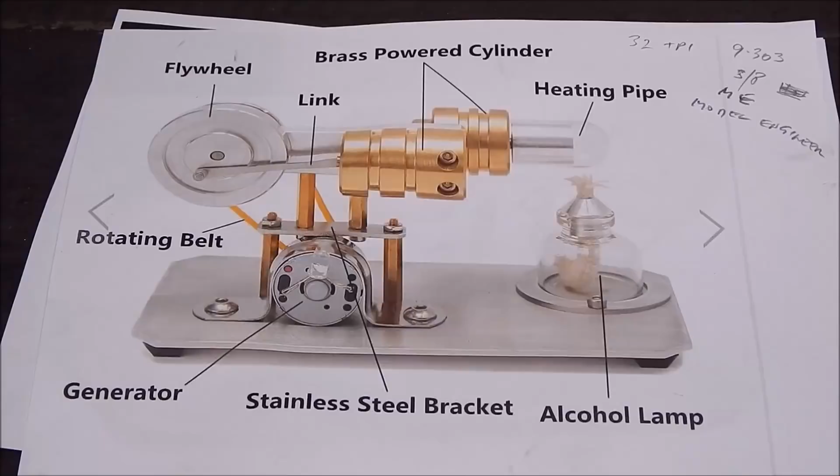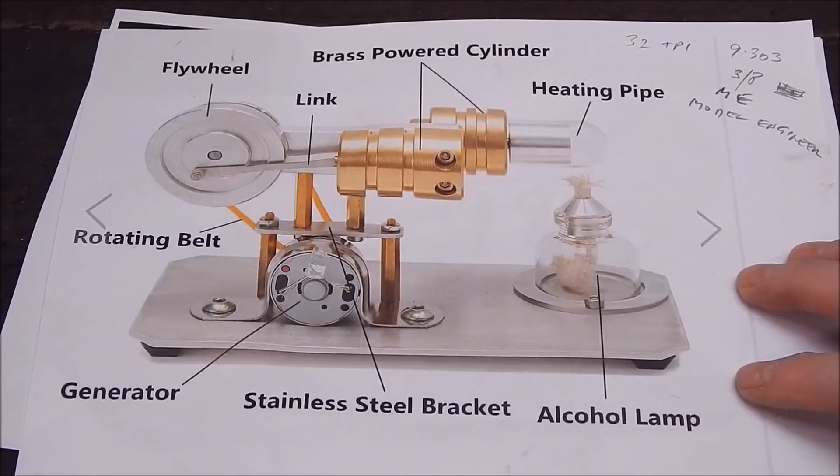The first cab off the rank is going to be a Stirling engine. I've been wanting to make one of these for a long time, and I've played around with this sort of stuff for years, but over the last 10 years I haven't done anything in this line.

Anyway, this is what I'm going to make up, something similar - this is a Banggood Stirling engine. These are some photos from the Banggood site, just that little twin piston thing, or displacer and the other compensating piston, I suppose you call it. It looks pretty neat, and it shouldn't be very difficult to make this really.

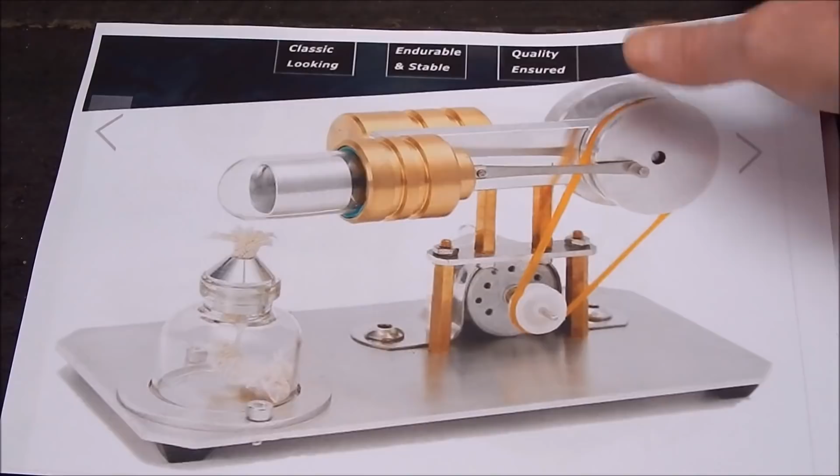I got these photos off their site. This one drives a little generator, can you believe? How cool is that? I think it was only about 40 bucks or something like that. It was cheap, for you know.

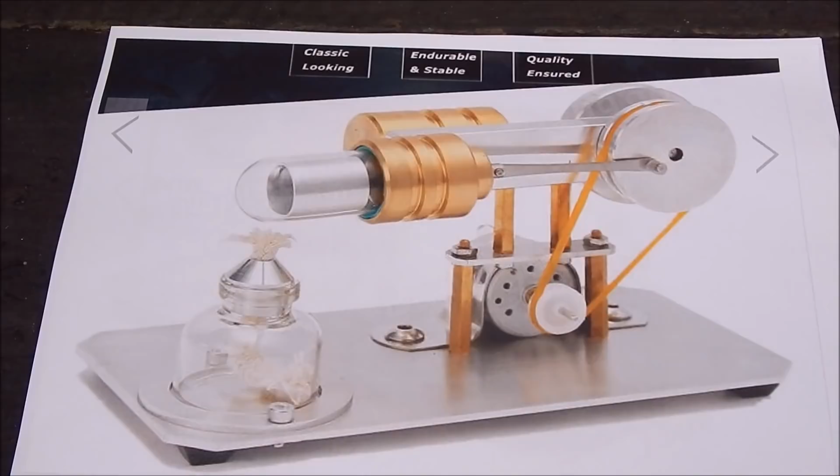As you can see, you can get some sizes here. Mine will be probably a bit longer than that, but that's what we're looking to make. That's where we're headed. So, what to do?

Well, first thing is to see how this piston here, which I'm going to do in glass, how that's going to work in.

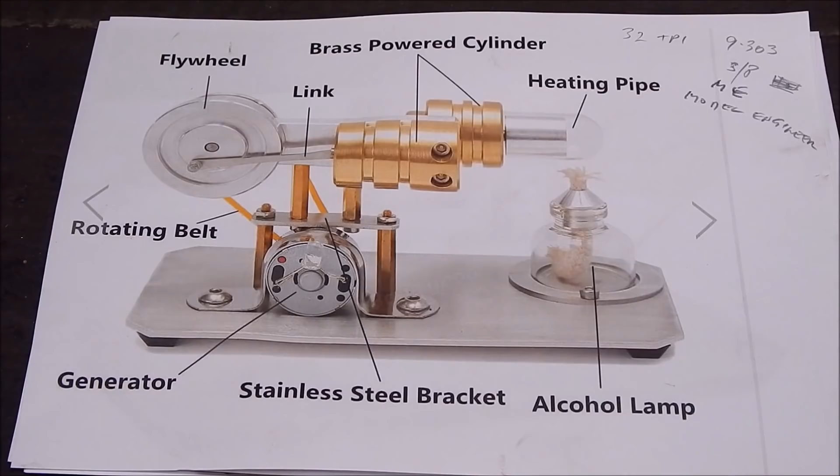Craig Group sent me a couple of air pots. These are really neat things, beautifully made, and they can be used as a dampener. See, they've got a graphite piston, and you can use that.

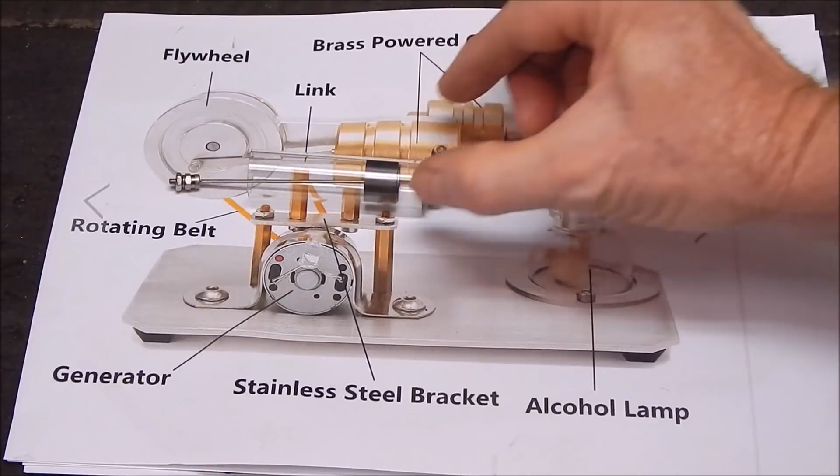So that I want to use as this piston here. I'm going to have that there, and then I'm going to make up in glass, and then make up a brass displacer over here. So basically, looking down from the top, you're just going to cross-link them.

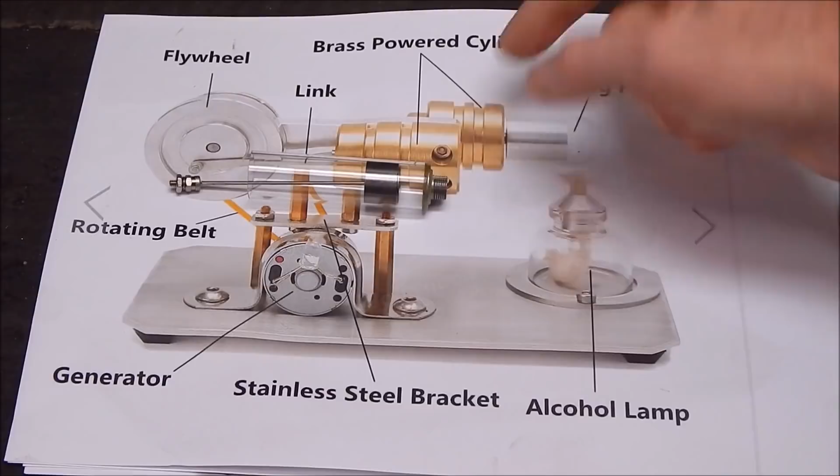Should be pretty easy, because you just have a piece of brass here, and they'll just breathe, one into the other, and then have a longer crank throw on this one. Yeah, it should all work out pretty neat, I reckon.

Okay, all pretty simple. I mean, these are real good, the way they make them are beautiful.

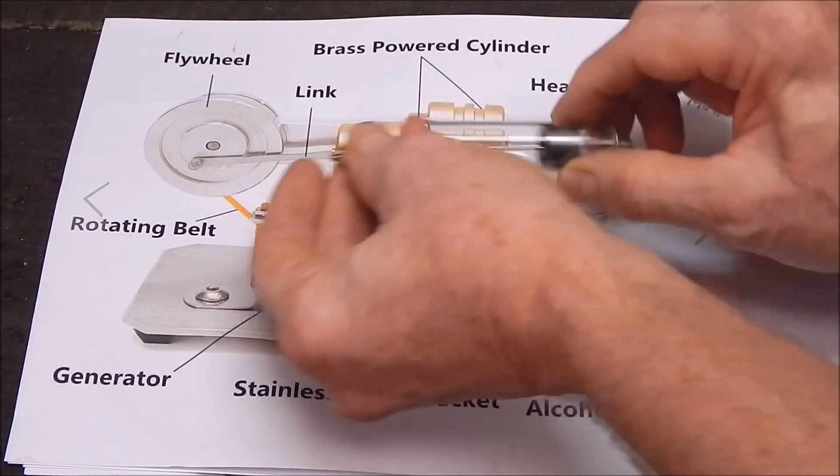Now, first thing is I thought I'd better check the tap on this, the thread on this, to see what size it is. And this is where you get your first surprise. It's nothing like any tap I've got. It's actually 3/8 ME - a 32 TPI 3/8, which is very unusual.

I have to look this one up. So ME is actually model engineer thread. So as I haven't got a tap, and I'll definitely need a tap to do the threading, either buy one if you can get one easily.

I know you can get them off eBay, but they're not cheap. You're talking $13, $14 for one tap, or a set of three for about $35, which is normal - that's the sort of prices you pay for taps in high-speed steel.

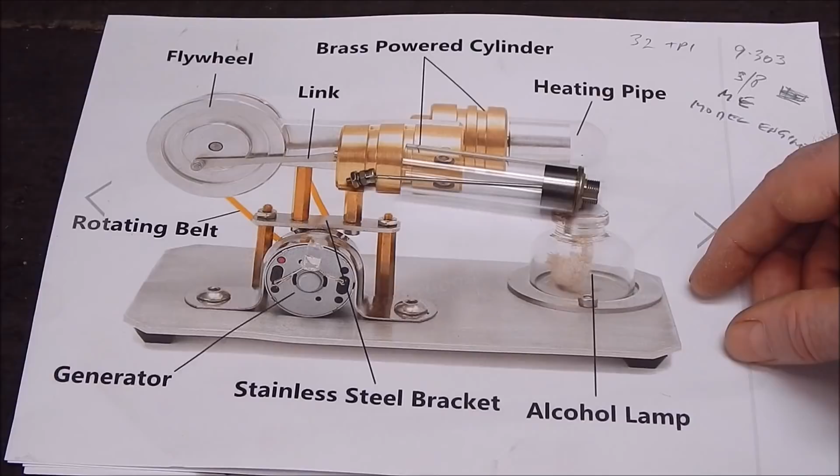So I thought, screw it, I'm not going to bloody pay that. I mean, I'm tight, as you know. Yeah, I'm pretty tight. So if I can make it, I will. So I made one. So here's the thread.

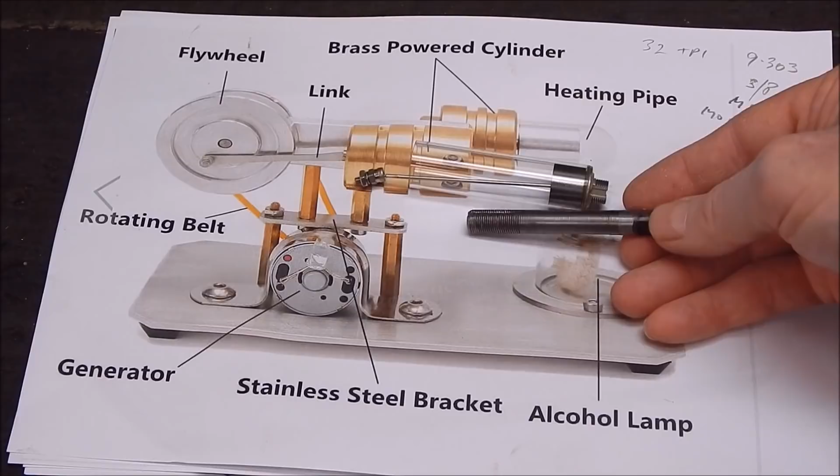Here's the tap here. It's no work of art, it's a bit... no, it's okay, I suppose. But anyway, for anybody that doesn't know how to make a tap, they're really, really simple to make.

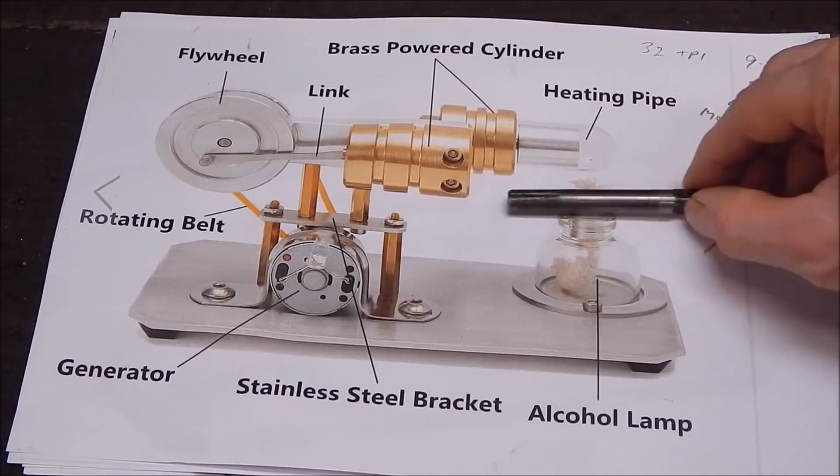Basically, all you have to do is get some steel, which is hard steel, but it has to be able to be machined. So I used a form of 1080 spring steel here.

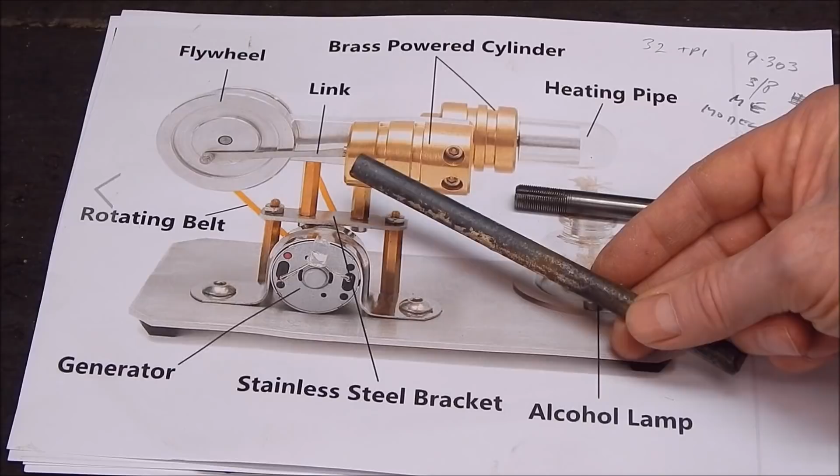It's not as springy as some spring steel, but it's hard enough that you can't machine it without annealing it. So heat it up red hot, let it air cool, and then you can work it. After you've done your machining and everything to your satisfaction, heat it up to red hot and drop it in a bucket of water, and she's hard again. That's the simplistic way of doing it, and it works fine.

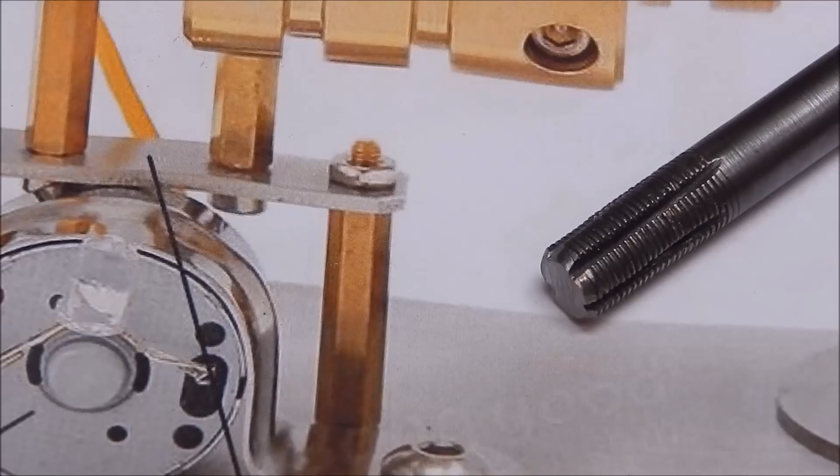So I'll come in close on my little tap here. As you can see, all it is, you've machined the steel down to the correct diameter that you need. You've cut a 32 TPI thread in it with a single point cutter.

You then slotted it with a slotting disc, and I just used a Dremel - any rotary tool will be okay. I've put 4 slots in it. A normal tap has 3 slots. You can make them as wide as you want. All they have to do is give you some clearance.

By having 4, this is a bit rough and ready, so don't get too carried away with this, but it works. By having 4 slots, it gives you 4 cutting edges, so it should theoretically cut a bit better than 3.

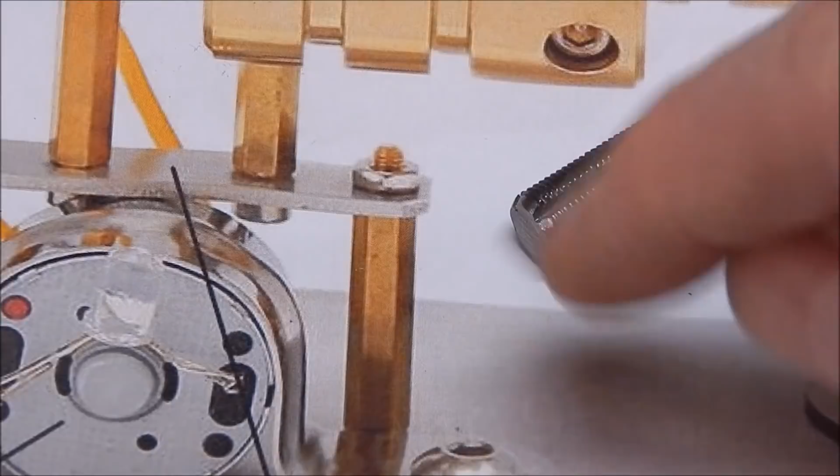And when you do cut the slots, you undercut towards the direction of rotation, so not straight down at 90, just cut it back on a bit of an angle, and that will give you more of a curve edge. Then just heat it up, drop it in the water, and she's good to go. And just put some flats on the end.

Does it work? Well, of course it works. I made it, it has to work.

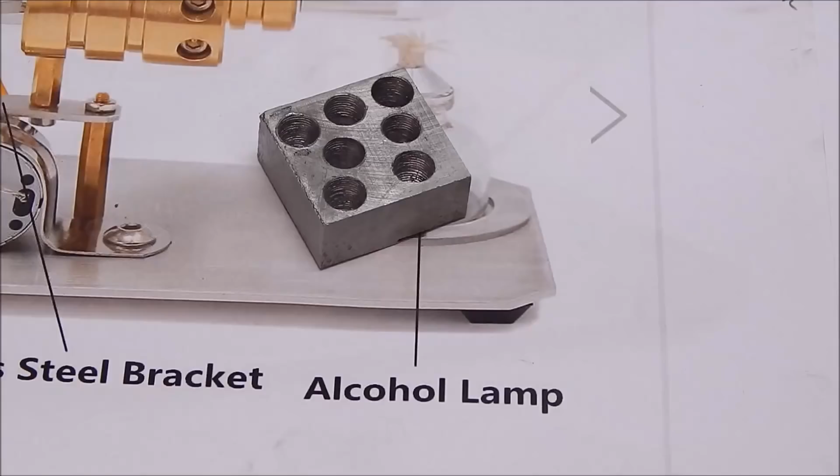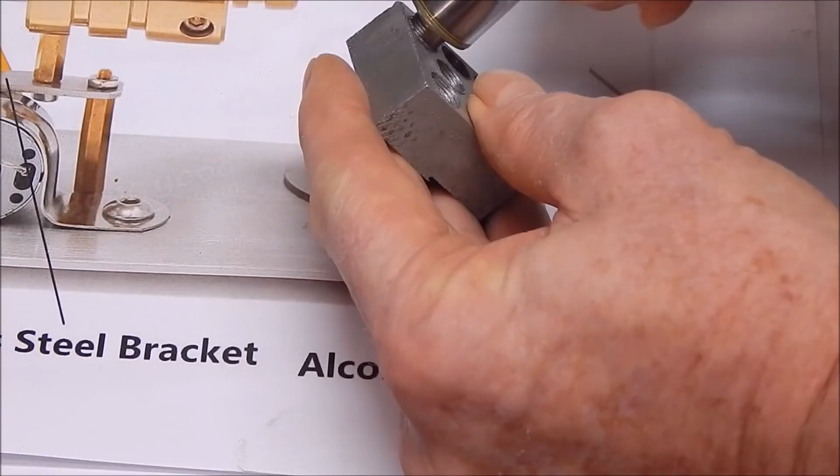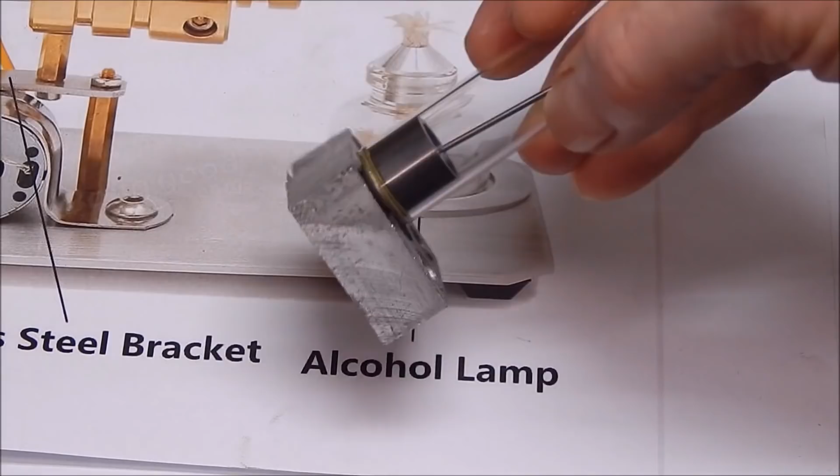So here's a bit of aluminium, scrap aluminium, that you can see I've played around with, drilling and tapping into it to make sure I got it right. I had to have two goes at doing this because there's a couple of things you have to be aware of. So this is just some scrap. Here's our little air pot. And she screws in. Look at that. Perfecto. No problem whatsoever.

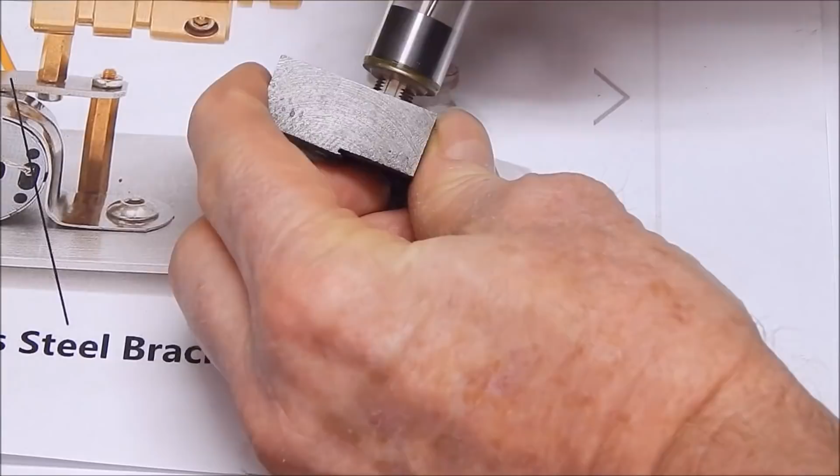I think this one over here also was the correct size. Yeah, this one's a bit more snug. That's better, that's the best of the lot. So I used a different size drill on that one. So there you go.

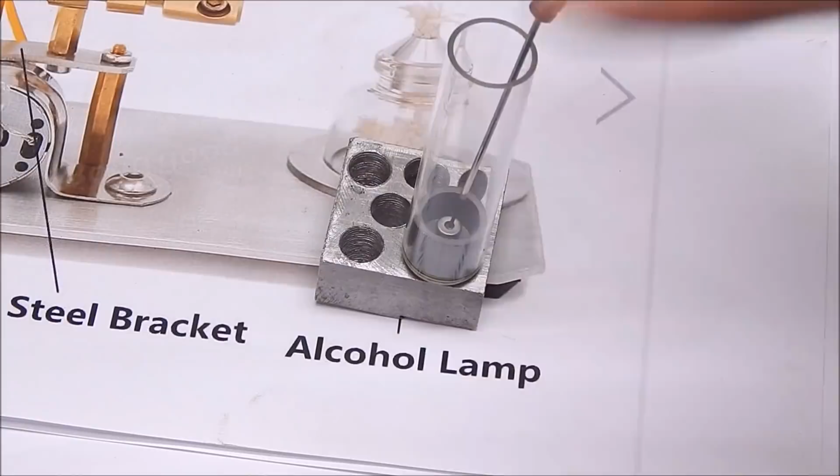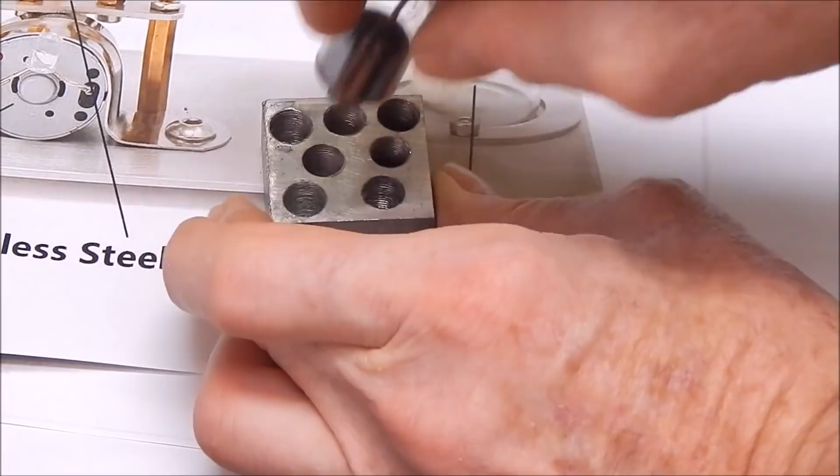Well, it's going to go that way, isn't it? Cool bananas, so there you go. Yeah, you can do your own taps, easy. And these are really meant for soft metals like aluminium, copper, brass.

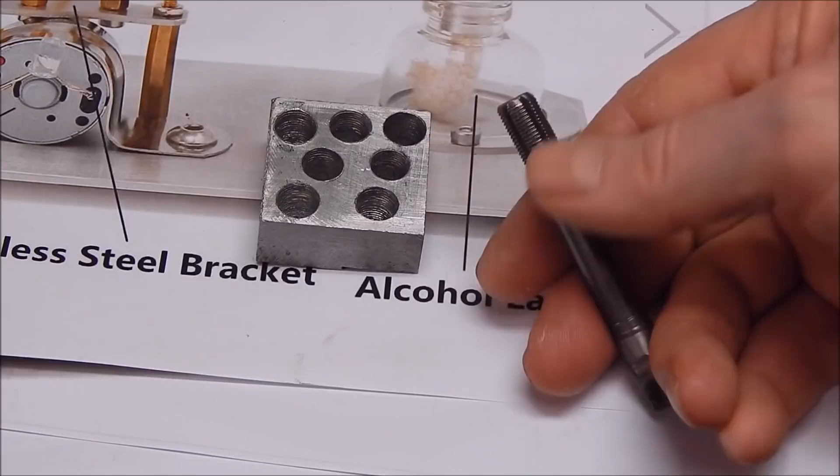Well brass I should have said, I'm not going to be using any copper. You could use them on steel, but they'd probably lose their edge fairly quickly. I've made these in the past for one-off jobs in alloy. I've never made one to use on steel, but generally working on stationary engines and stuff like that, which are aluminium, I've had to make up studs and stuff, put in bigger studs, and you haven't always got the right tap, so that's it, that's the name of the game.

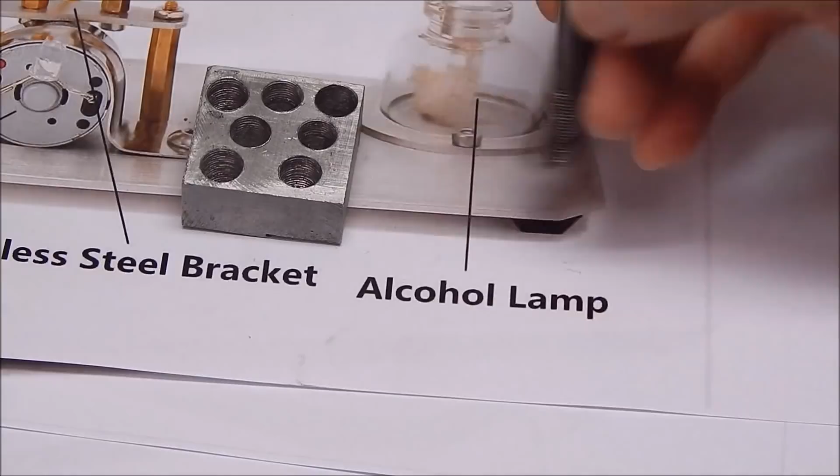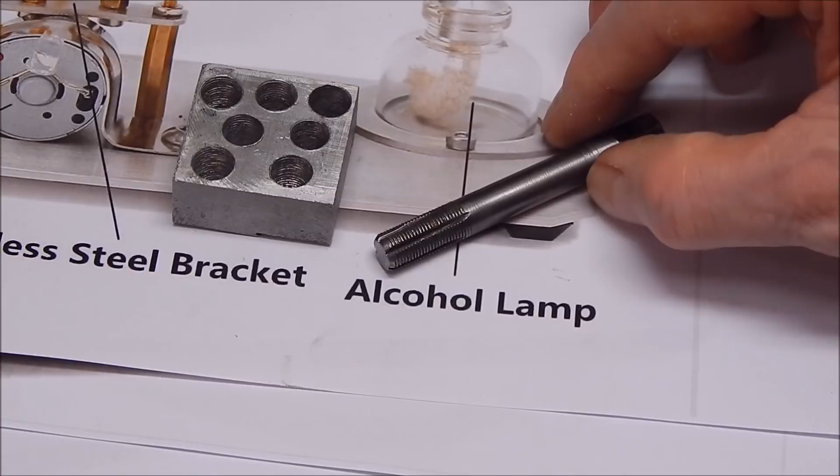So what could possibly go wrong making this, with all these extra holes here? Well, this is a fairly shallow thread for a start. Being 32 TPI, it's not going to be a deep thread, particularly in 3/8. So when you drill your hole for the thread for the tap to go into, you have to make sure you use a correctly sized drill. This is where not all drills are the same.

There are big variations. That's why people go by thread charts, but quite often thread charts aren't actually all that accurate, because there's a variation in drill sizes. You might pick up a drill which is supposedly 5/16, but if you measure it, you'll find quite often it's not. It could be 10% either way. Measure your drills with your micrometer, your drill sets, you'll get a big surprise when you see what they actually are. They're not always the nominal size. In fact, they're rarely the nominal size, particularly the cheaper sets.

So anyway, what am I saying? Well, when you machine this up, there's a couple of things you need to know. First off, we'll measure this tap, and we'll see what the actual thread diameter of that is.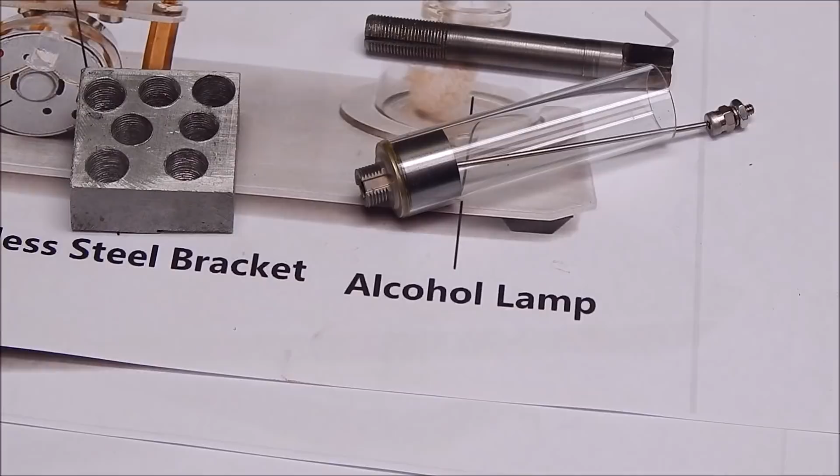9.33... 9.327, that's more like it. Yeah, so it's basically 9.3.

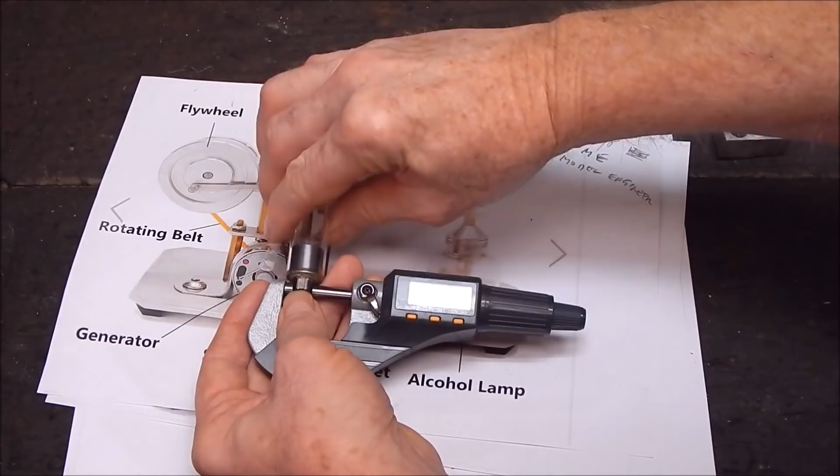Now, the problem you've got is that when you machine the rod to size, 9.3, we would machine this blank down to that. Now, if you machine it with a single point thread at that size, what's going to happen is it's going to be too big, because even though this is the same size as the thread diameter...

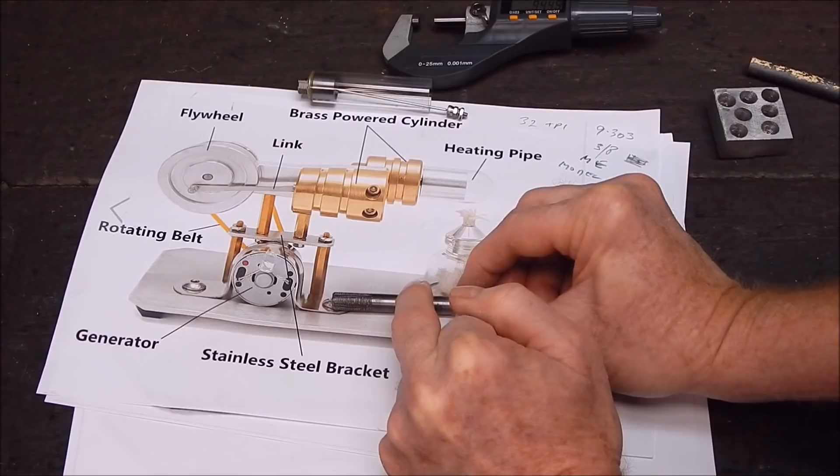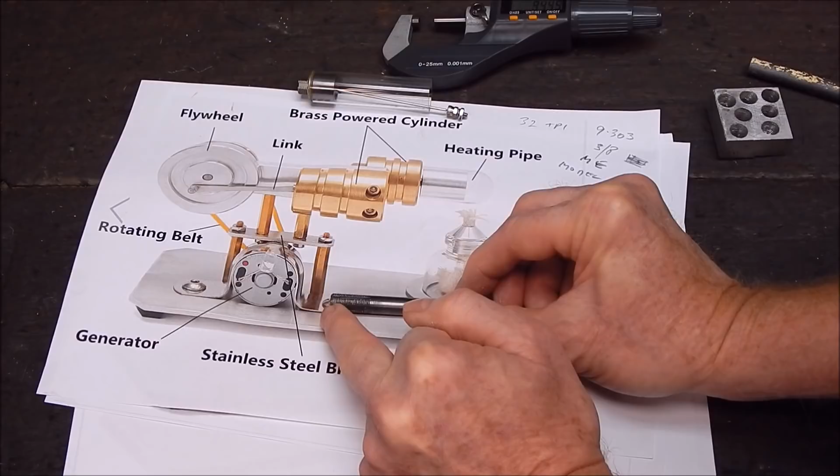When you do single point cutting, and it varies with the metal how much is going to happen, not only are you cutting, but you're also compressing, and metal will move around, and basically what happens is the thread will grow. The diameter of the thread after cutting will be larger than what you started with. So that means the thread you cut will be too large. So you have to reduce the diameter of your starting blank to compensate. So whereas we were starting with 9.3 mil, I reduced it back to 9 mil after the first one I made was too sloppy for my liking.

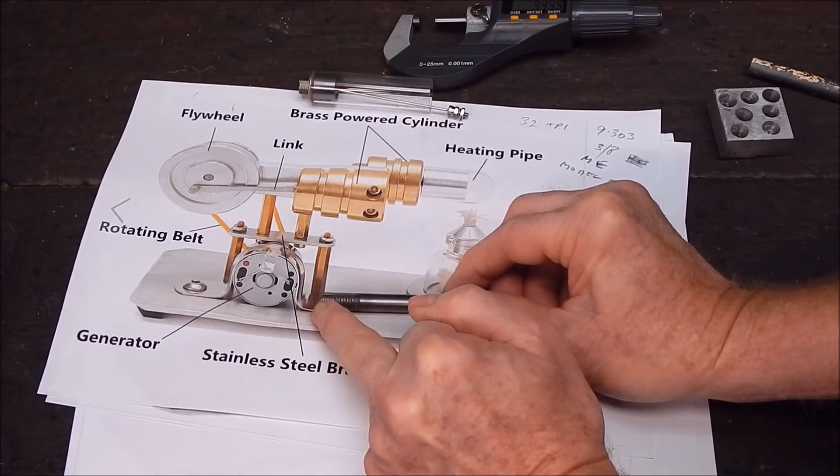And at 9 mil, it then cut a 9.3 mil diameter thread. So basically, you've got 9 mil here and 9.3 there. So it's a perfect thread. That's what you have to watch out for.

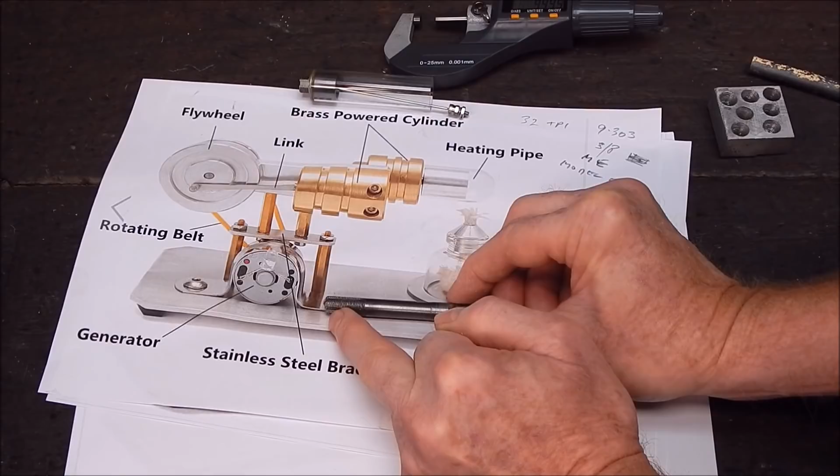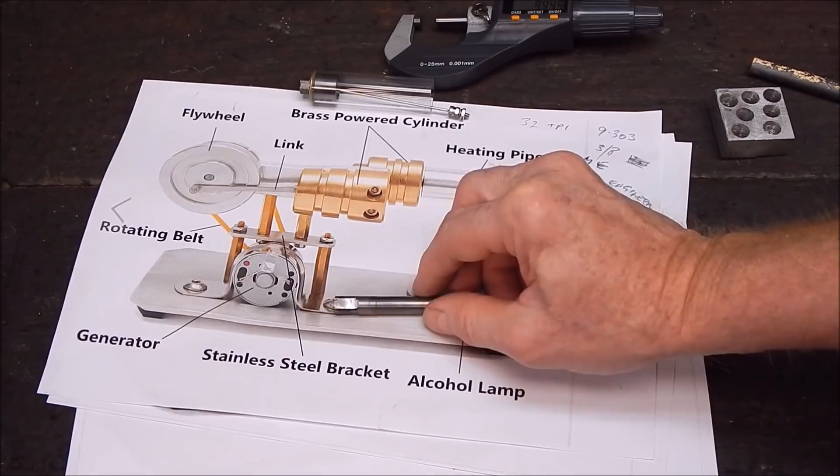Also, when you do your single pointing, make sure you've got the angle of the thread gully correct. This thread is a 40-degree thread by my measurement. Normally they're 60, that's the most common thread angle. So I had to grind a special single point cutter to do the job. But basically that's it, it's very, very simple to make these up. Anybody can do it. You just grind your flats on with your bench grinder, nothing very flash about the whole thing. So there you have it.

So yeah, if you want to make a tap up for a one-off job and you don't want to spend money, you want to be tight like me, this is how you do it. All right, well I hope you got something out of that. Just showing you a couple of things to be aware of, get into it, do it.